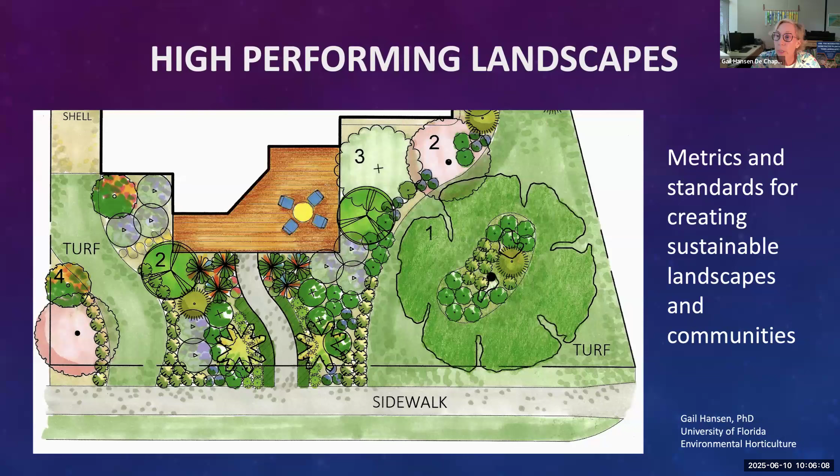Thank you, Mark, for that introduction. So welcome everyone. I think you know by now that we're going to be talking about high-performing landscapes today, and we're going to talk a little bit about the metrics and standards that you can use to measure those landscapes if you want to make them more sustainable, and also for more sustainable communities.

Some of you may be familiar with the term high-performing landscapes. If you're not, it's actually a pretty simple concept. It basically is a landscape that will fulfill the intended purpose - why did you create that landscape, and what goals did you have for it? It will fulfill those goals, but it also contributes to sustainability, because that is the hallmark of a high-performing landscape: it's highly sustainable, and it is also a landscape that meets your environmental, your social, and your economic goals.

But the key is that you have to measure, have different metrics, but you have to have measurable outcomes in order for you to know if it is sustainable, and in order for you to know if you have reached your goals.

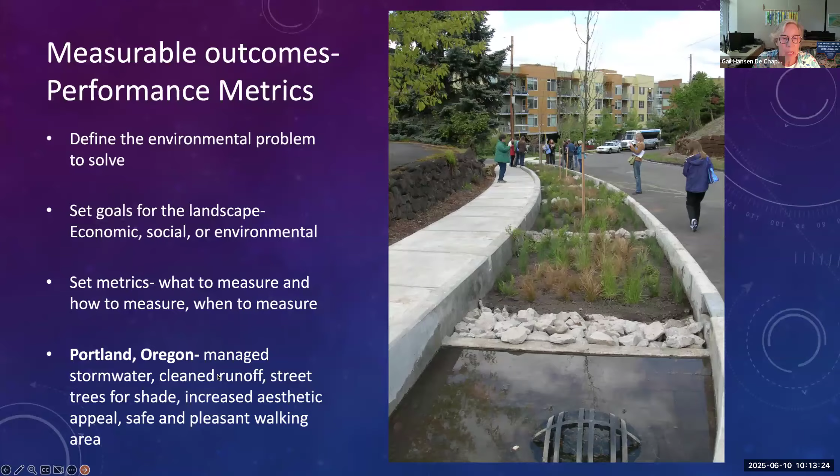And the doctor says, well, in order to do a before and after, and to see if you're improving and becoming healthier, we need to take some measures here. They're going to look at your cardiovascular health, probably listen to your lungs, take your blood pressure, maybe take a blood draw, ask you about your joints and how they're working.

And ask you about your diet. Then they'll send you off with a prescription, and they'll say, okay, eat less of this food, walk more every day, go to the gym and work out. And when you come back, we'll look at all your lab work and everything we did before, and we'll see what improved. That way you'll know if you are now a healthier person or not.

And the person themselves can say, hey, I could only walk one block and now I can walk ten, or I can lift a lot more weight, or I've lost 20 pounds or whatever. So those are different metrics and ways of measuring to know if you are now a healthier person.

You can do the same thing with the yard. You can say, you know what, I want a more sustainable, healthier yard. And they're looking at their yard and they go out and say, when I go out there, I don't see any pollinators, I don't see any butterflies, I don't see any bees. And I'm using way too much water in my yard.

And I'd like to be able to spend more time out in my yard - I don't, because it's just not a good looking yard. And I'd like to attract more wildlife. So those are their objectives for their yard.

Then they call in the expert, and the expert does a little investigation - an inventory and analysis similar to what a doctor did. And they say, hey, you've only got one tree, you need more trees, so let's plant more trees. You need more flowering plant material. You've got a lot of pests here, we need to take care of that. And maybe you want some edible plants in your yard.

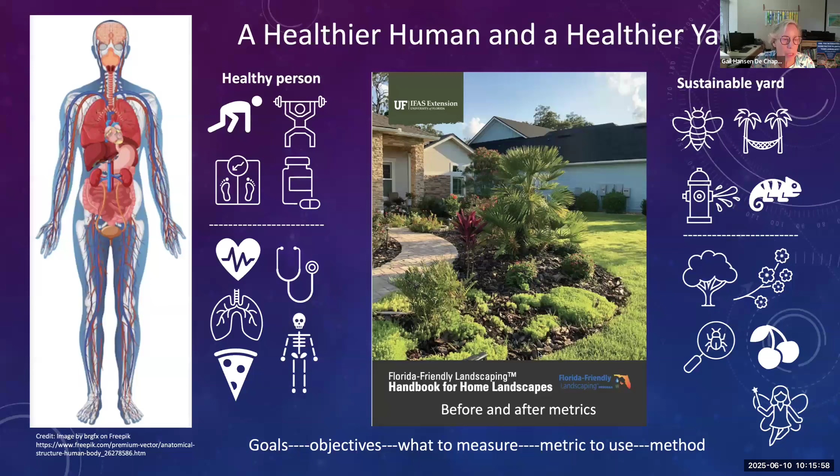One of the things in this document, which I think you can download from the Florida Friendly website, or you can go to the Environmental Horticulture Department on the UF website - if you find my picture underneath it, you can click a link and download this document. In the document is this chart, which we put together for performance data and metrics. In the corner, we have the functional measures.

So we went through and made a list of things you can measure in your yard using metrics of various kinds, and then linked them to design strategies. We said, if somebody wants a more biodiverse yard, we can measure biodiversity, and one of the things they can do is use the appropriate plant palette - right plant, right place, or I'd like to say right plant every place. That's one way we can increase biodiversity.

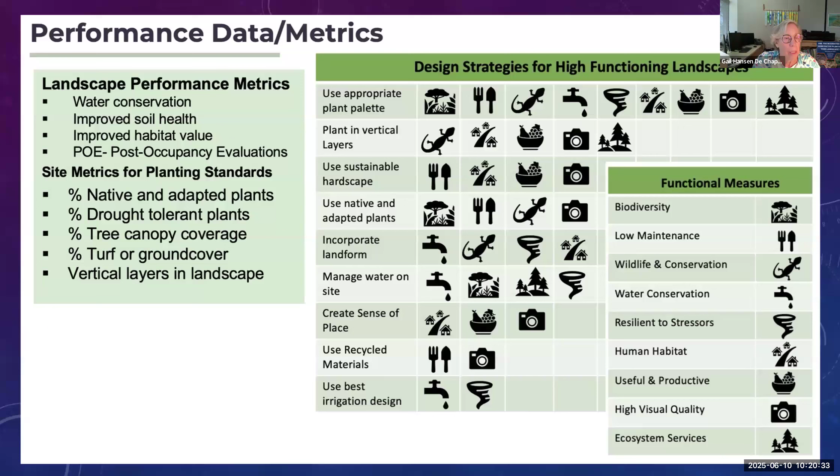And then I'm going to talk about the metrics here - what can you measure with these functional measures? Biodiversity: you can measure things like the number of plants. You can measure volume of water, perhaps for water conservation. You can measure time, and you can measure percent.

These are just a few of the ways you can use your metrics to know what your landscape was like before, and what benefits you got after making those improvements. So for biodiversity, count the variety and number of plants - variety and abundance.

For low maintenance, keep track of the number of minutes you spend maintaining your yard, and hopefully your benefit will be time savings. The number of insects, birds, and mammals in your yard, you can count that, and hopefully you'll see your outcome is more pollinators.

Volume of water used or minutes that you irrigate gives cost and water savings. For resilience to stressors, count the number of plants you lost during a drought or a freeze. The outcome might be that you save replacement costs if you have drought-hardy plants, or you don't use plants that will freeze in your location.

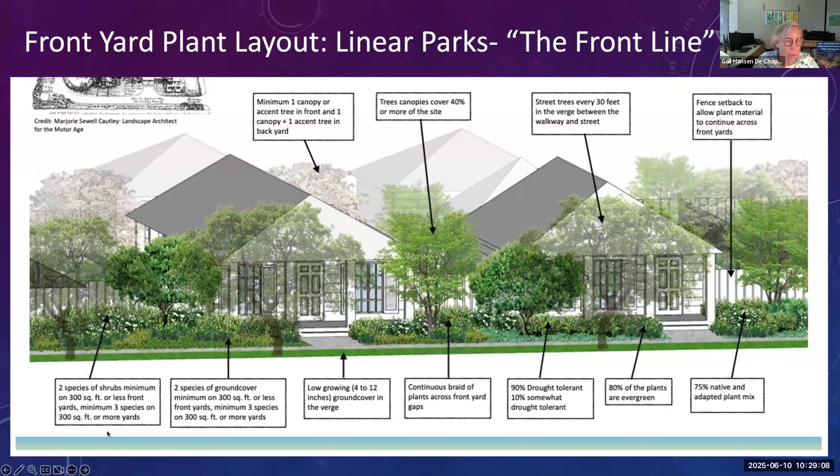There are 2 developers right now down in the Lake Nona area who are testing this idea of having this front line. I haven't talked to them recently to see how things are going, but one of the key things here is that on these frontline landscapes, they have the same company maintaining all the landscapes all the way down. They've told me that the maintenance is easier because they know all the plant material.

This is a very touchy screen here.

Another thing I wanted to talk about quickly is form-based codes for walkable urban streets, because I want to show how these metrics can also work for an entire community and not necessarily just for landscapes.

I had to pull all this out of the archives. This is a study that I did for my dissertation years ago. Form-based codes would be a perfect example to show, using form-based codes for walkable urban streets, because a lot of the high-performance landscapes are based on codes, are written into codes, the metrics that you use.

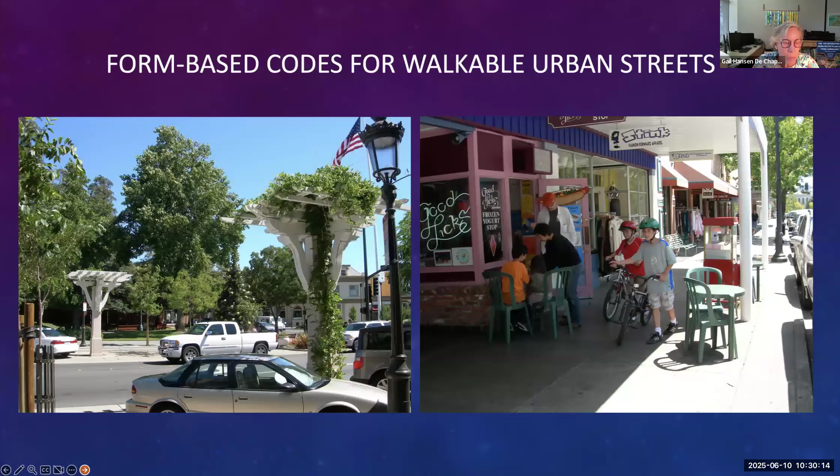So I was studying form-based codes. If you don't know what they are, they're codes that regulate the form of the street, the visual qualities of the street and the spatial dimensions of the street corridor. The advocates of form-based codes say this is a really great way to create a walkable urban street. When I was studying it, there was actually no research to show whether they actually did. It was just the advocates, or the people who write these codes, saying that those streets would be walkable.

So I went to a lot of these communities. All of them were in the San Francisco Bay Area, which is where the idea of form-based codes was born. There were a lot of small communities around the Bay Area, mostly agricultural communities, using this form-based code concept to help with the economic vitality of their small towns.

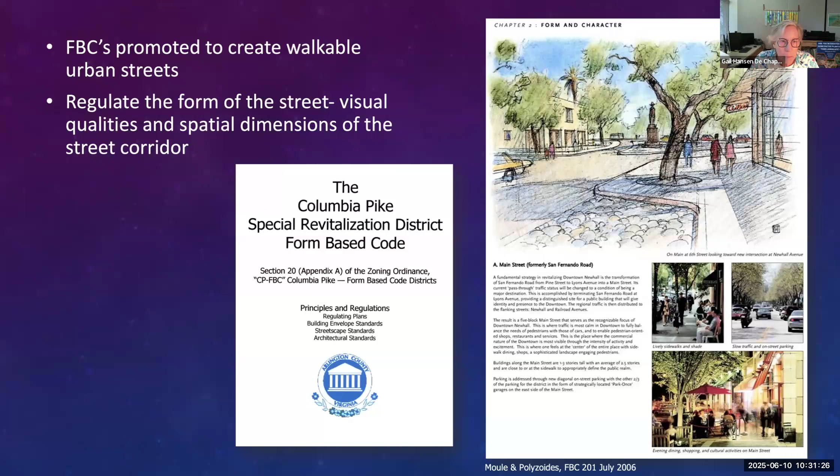So I went and reviewed their form-based codes and walked their streets, using a survey that I did not write, but somebody else had written, to measure all of these qualities on the street to see if they really were a walkable street. Somebody else has done the studies about what design qualities are important to walkability, and they found that they can be defined, measured, and quantified.

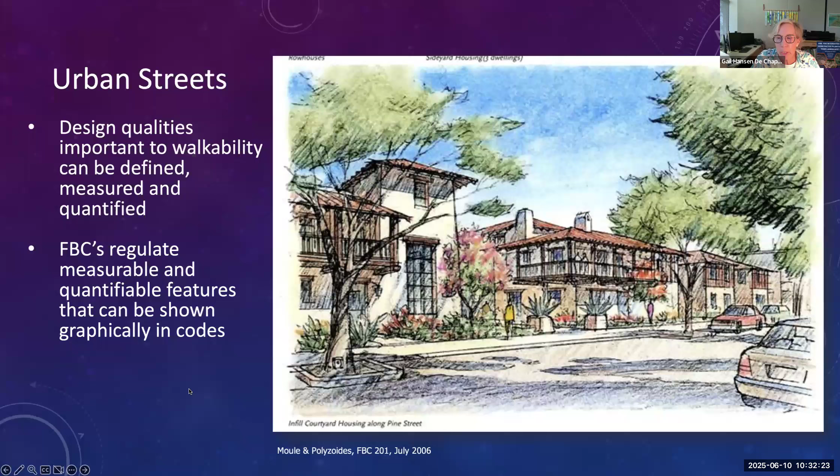So the whole idea of the form-based code is to regulate these measurable and quantifiable features, and they can also be shown in these codes. Here's another image from a code showing what that walkable street might look like and what some of those elements in the street are.

These urban design qualities, which they call UDQ, urban design quality models, were identified in research by Reid Ewing, who had a grant from the Robert Wood Johnson Foundation, which gives grants for making healthier communities. They came up with a document, a final report, called Identifying and Measuring Urban Design Qualities Related to Walkability, and they also have a field manual that guides people in how to do this. So these are the models they identified: imageability, enclosure, whether the street is human scale, whether it has transparency, and whether it has complexity.

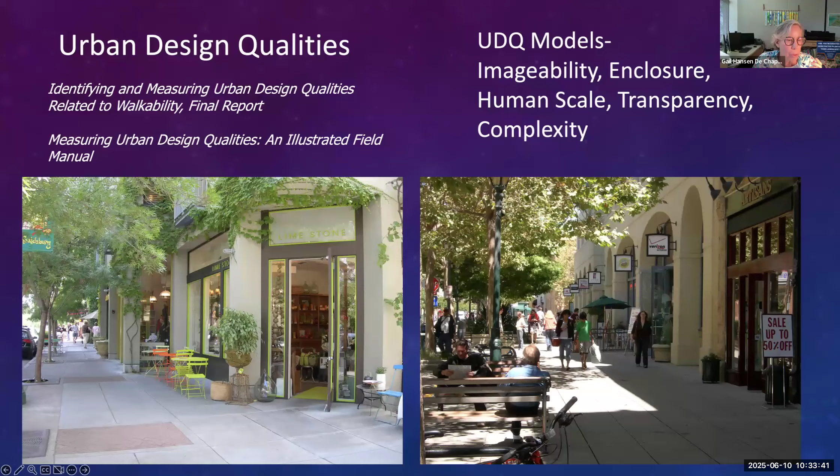I'm going to give you some examples of each of those urban design qualities. Here are some pictures from a couple of the streets that I visited. The one on the right-hand side is a street in Palo Alto that actually goes to Stanford University, and the other one, I think, was in Healdsburg, just north of San Francisco.

So, imageability. That just means how memorable was that street? I'm sure all of you have gone to a small town or even a large city and walked down a street that you remember for whatever reason. It was just interesting or fun to walk down, with a lot of things to do. The landscape in particular is memorable.

Some features you'll see on a memorable street include little courtyards, little plazas, little pocket parks—places to sit and rest for a minute, to hang out. Then historic building facades that are very interesting with a lot of detail, buildings that are not rectangular in shape, so they really stand out as some kind of cool architecture. The other feature was a lot of outdoor dining possibilities—and by that we don't mean just a couple chairs and little tables outside, but some real true outdoor dining. Here's one that actually has white tablecloths, places that show ability for social gathering.

The other one is enclosure. Enclosure are those elements that help define the street so that you feel like you are in a well-defined space, a room, for example. So awnings and overheads are something that is recommended, not just for the enclosure aspect, but also protection if it starts to rain.

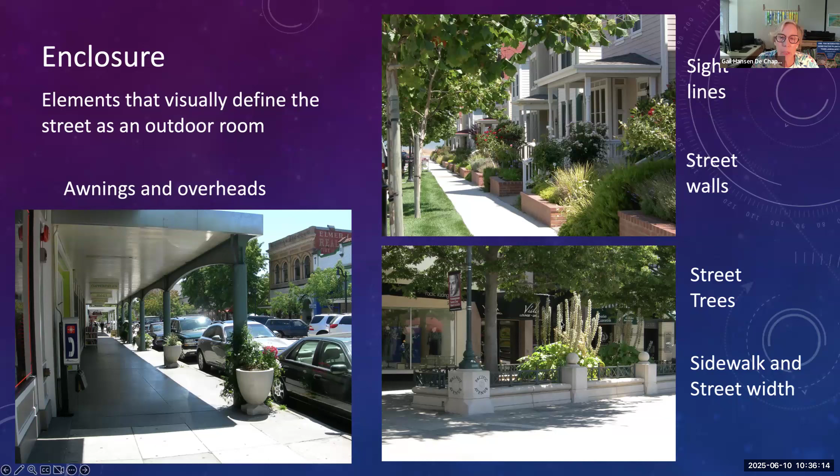Street trees are important for their canopy overhead. They give this feeling of enclosure and protection. Some of the other street features, like the width of the sidewalk, are also important.

Human scale. That one's pretty easy to measure. It's elements that match the size of humans, and proportionately fits in with human size.

Things like planters, for example, little decorative planters. This planter here represents the bottom half of an egg, because one of the cities I went to was Petaluma, and they're the egg capital of the world. So they have planters all along their streets that resemble these eggs.

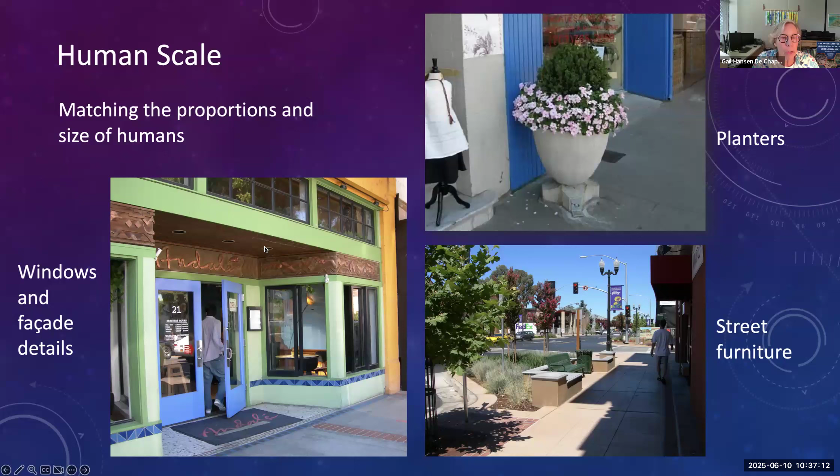Street furniture that is comfortable to sit in, could be benches, seat walls and so forth, and windows and facade details. The windows let you see into a space, but the facade details and wall details like tile and other things, you can get up close and look at and enjoy the detail of it.

Transparency is another one. Transparency is the ability to see into a building and see what's happening in the building, and also having windows and doors so that people inside can look out and see what's happening on the street. This gives people a feeling of safety, eyes on the street, knowing that people can see them and they can see in the building.

There's nothing worse than walking down a street and having a building that's a blank wall, and you just see doors, but you don't even know what's happening in that building. Also, seeing activity inside the building tells us there's things we can do here on the street.

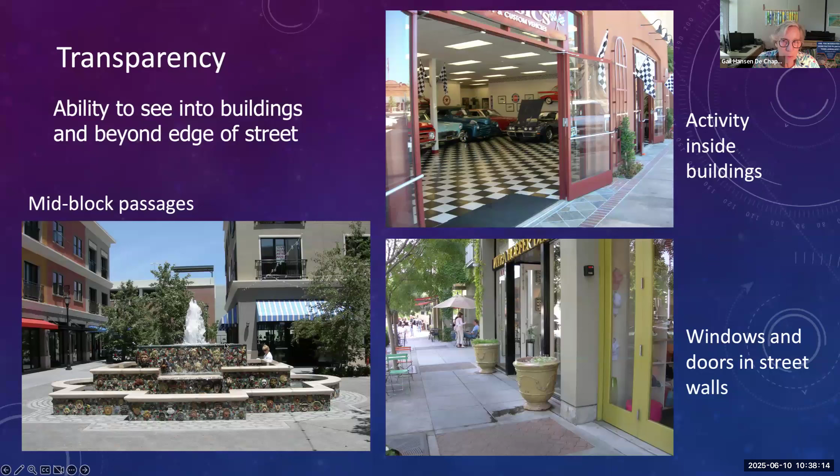And then in between the blocks, maybe having secret little courtyards, a little way you can cut between the blocks. I found that fountains were very popular to use for that.

And then complexity. Complexity is the variety of elements, or the visual variety in the environment, because we like to see a lot of different things. We don't want to be in a boring place. So public art is one way to get a lot of variety.

A variety of elements like this circular arbor here with the fountain in the middle, which happened to be in the middle of a roundabout. This was in the town, I think all these pictures were taken in the small town of Livermore, just outside of Berkeley. It's mostly famous for the Lawrence Livermore Lab that UC Berkeley has there, but it's a cow town, famous for their rodeos.

Things like distinct buildings and different building colors and so forth. Most of these codes are either to redo a historic street, like the historic main street of a town, or on other streets where there might be just plain old strip malls, or just a not very attractive street, to put in new buildings that have all of these facade details and so forth that the form-based codes recommend.

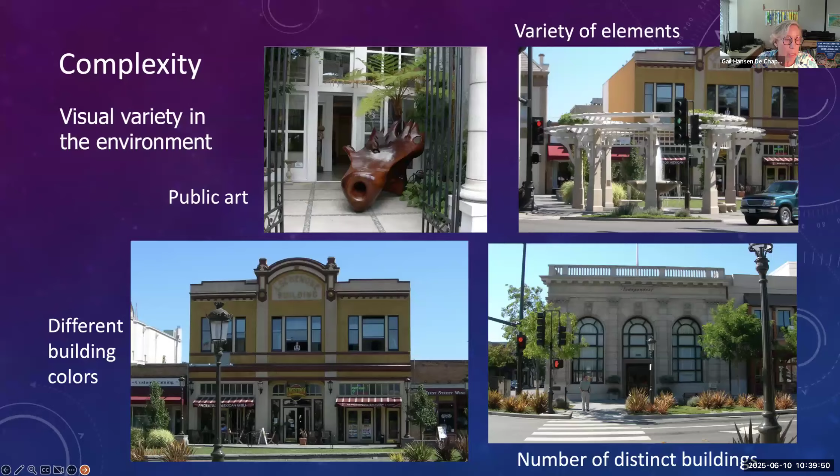So then I took this street survey. Of course, somebody else had developed this survey, Reid Ewing, and I went to all these different towns that had used form-based codes, but I also went to other towns that were well known for having a walkable street, so I could compare the two.

You just walk down the street and you count the number of, under imageability, for example, on this score sheet, you could count the number of courtyards and plazas and parks, the number of historic buildings, maybe number of buildings with identifiers, which are signs. So you're just doing a count as you walk down.

So it was actually, in terms of research, a lot of fun. I actually took my mom with me, and in the morning we would go and walk down these streets and fill out all the score sheets. Then in the afternoon, we'd just hang out and go shopping or go to some place to eat and have fun. So real tough research there.

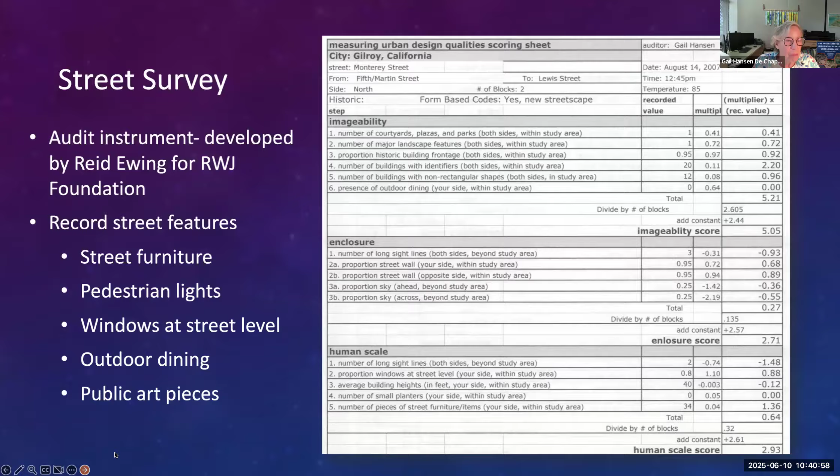But these codes also have street metrics, recommending widths like 10 feet for sidewalks, 6 feet for an outer sidewalk not under the canopy, 6 feet for the verge where street trees are, and so on. These are the dimensions of the street that are really important.

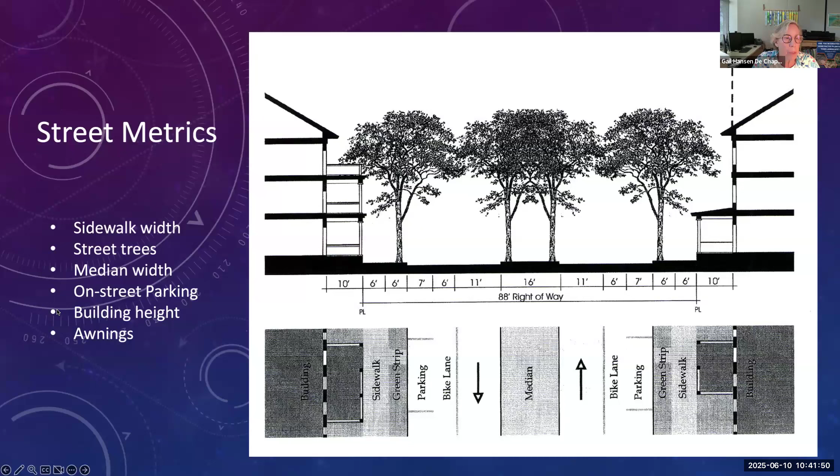Studies have shown that for a street to feel enclosed, walkable, and good, you shouldn't have over a 100-foot right-of-way, and you want to keep streets a bit more narrow. Other recommendations include building height of at least 2 stories, sometimes 3, and the use of awnings and so forth.

Most of these codes specify how many windows you need, or they'll say something like your upper facade needs to be 75% windows or transparent glass, and the bottom floor needs to be 95% transparency or windows.

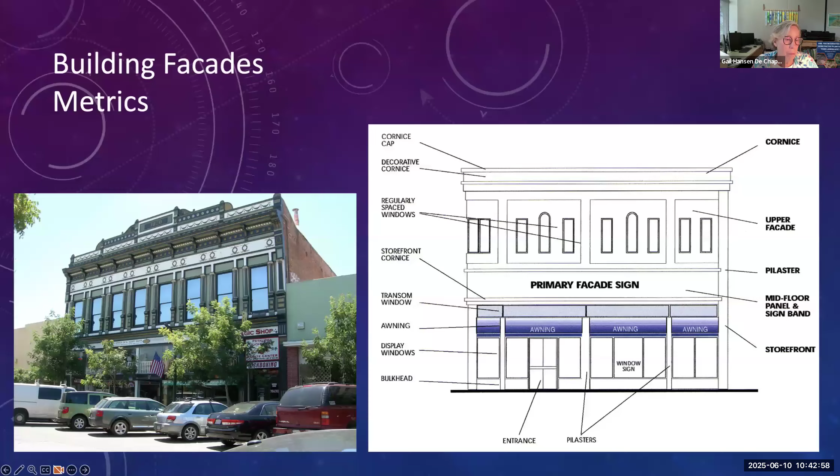They'll also usually include streetscape and landscape metrics, such as a plant list of required types, maximum heights of plants, and maybe seasonal color. For example, on a street you usually want low plants and high plants because you need a gap to maintain vision to see traffic, especially if you're pulling out of a parking lot.

Some codes will simply say they want it to be very colorful, while others say they want to use all native plants. So the landscape might look very different depending on these codes.

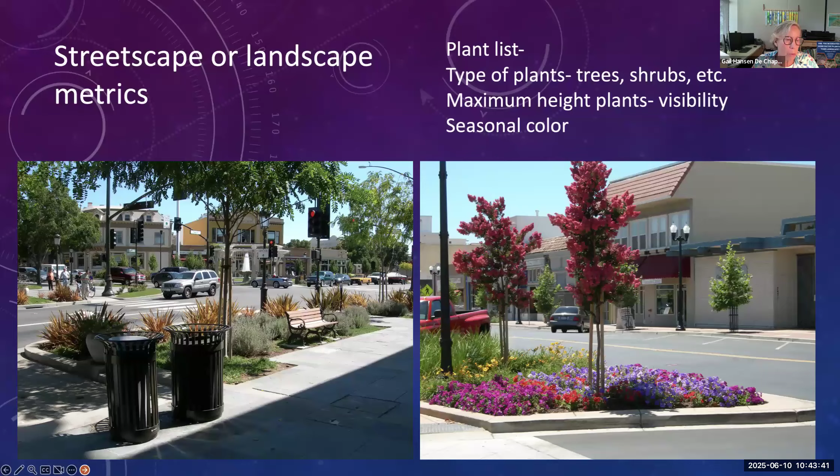In the end, my research led to some recommendations for what to include if you're writing a form-based code to ensure walkable streets. One is to regulate a high total number of features, like benches, planters, signs, glass storefronts, street trees, and so forth.

The other is to regulate the frequency of features within a set distance. You might pick a 1-block or 3-block distance and say you need 20 street trees, 10 benches, or a certain number of planters in that span. So it's not only the number of features, but their frequency within a certain distance.

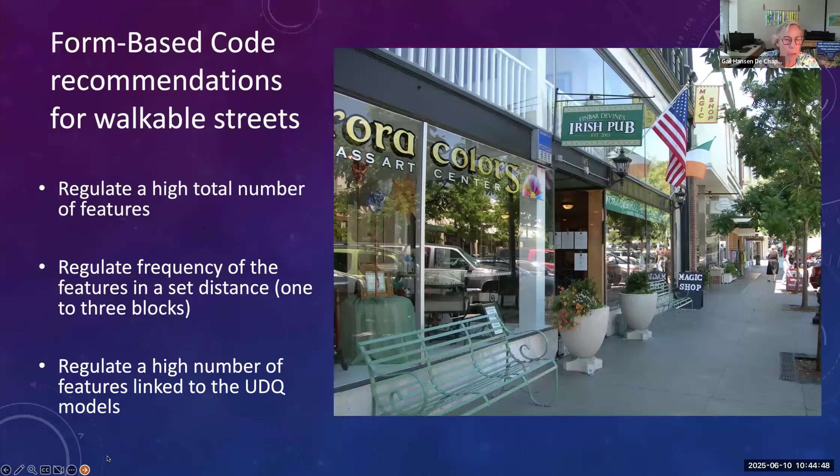Also, have a high number of features linked to your urban design quality models in your codes. The most important ones to focus on are those linked to imageability, complexity, and human scale, since those are most important for walkability. You should be most prescriptive with building materials, colors, facades, street furniture, and the spatial dimensions of the street.

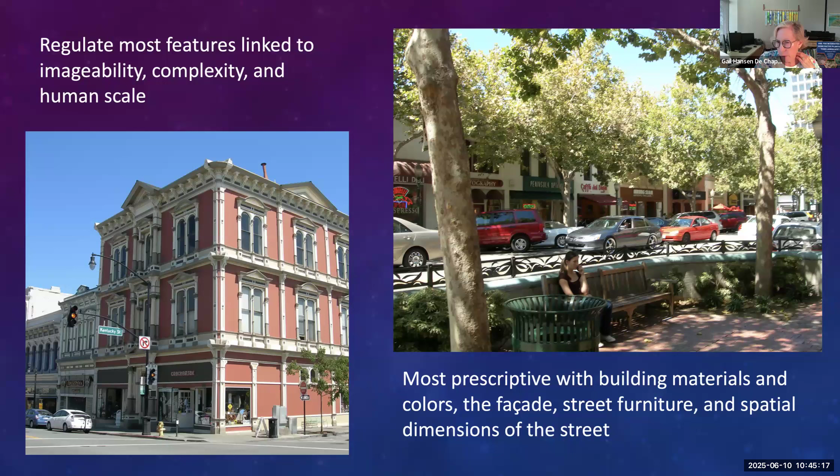So I wanted to show you this to demonstrate that a high-performing landscape isn't always just the plant material, but everything else in that landscape that creates the environment you're in.